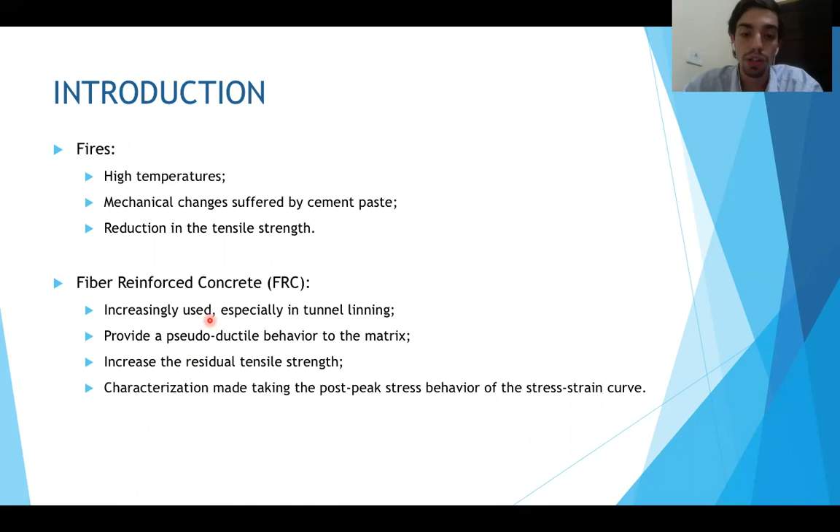The use of fibers is increasing in Brazil, especially in tunnel lining, a situation in which the fire is crucial. In addition to the ductilization, fibers promote the increase of residual tensile strength. In other words, the increase of post-cracking strength. A major guide for FRC is the fib Model Code 2010, published in 2013, which provided a great guide to design of structures of FRC.

To characterize the FRC, we have the flexion test, which offers results against safety, because the fibers act in tensile strength and there is no pure tension, only flexion; there is a portion of compression adding the resistance. In addition, the specimens are large prisms, which are difficult to handle, especially after being submitted to high temperatures, which makes the concrete matrix fragile.

There is also the double punch test, but it causes crushing of the matrix and its analysis is difficult, since the crack, which is a difficult area to be measured, is complex. Finally, there is the DEWS test, double edge wedge splitting, proposed by di Prisco in 2013, a test with a more difficult preparation, but which provides results that are easy to read. It was the method used in this research.

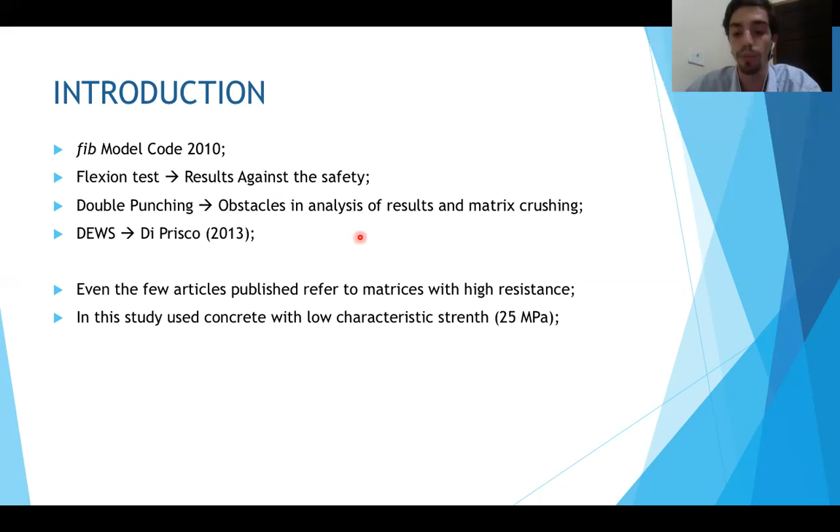The literature on FRC at high temperatures is very scarce, and the published articles refer to the matrix of high resistance. In this research, we used low strength concrete, class C25, common in the city of São Paulo and throughout Brazil. We use as material for molding high initial strength cement, artificial sand, gravel 1, superplasticizer additive, and short cold drawn hooked end steel fibers in a content of 25 kilograms per cubic meter of concrete, and a water cement ratio of 0.58.

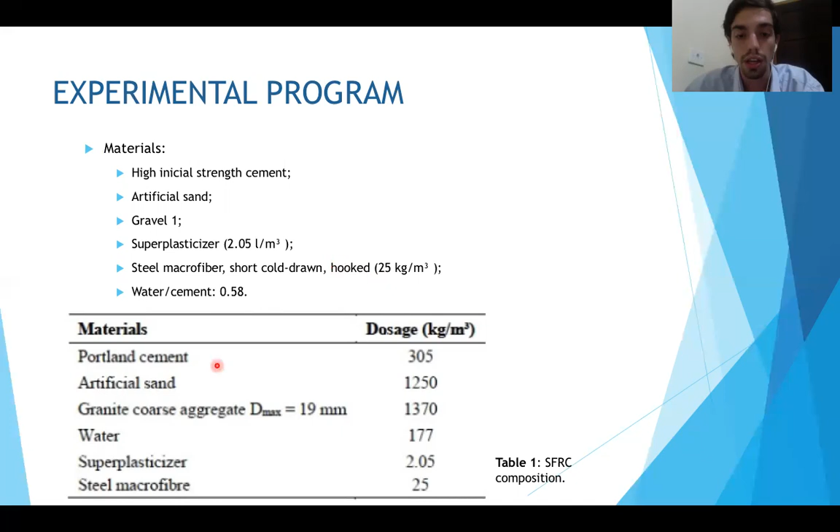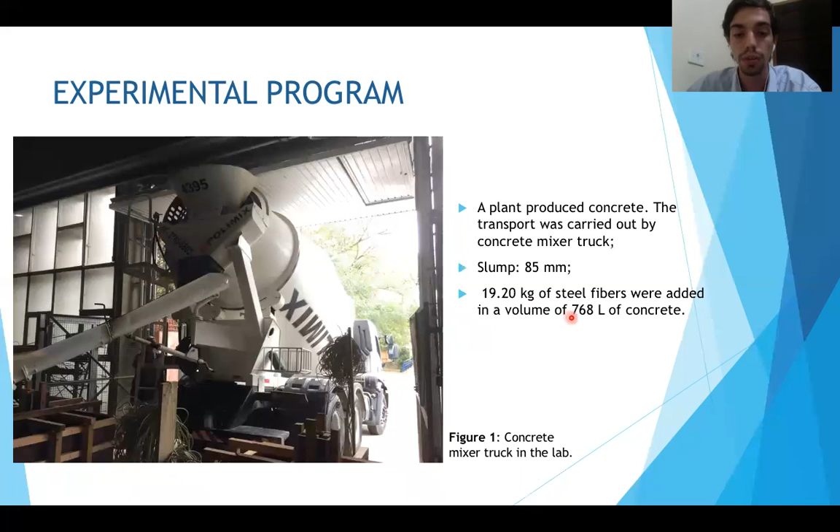The dosage of all materials is in accordance with the table shown here. A plant produced the concrete, and a concrete mixer truck carried out the transportation to the lab. The slump test resulted in an 8.5 centimeters reduction. Removed from concrete for other purposes, 19.2 kilograms of fibers were added in 768 liters of concrete, resulting in 25 kilograms of fibers per cubic meter of concrete.

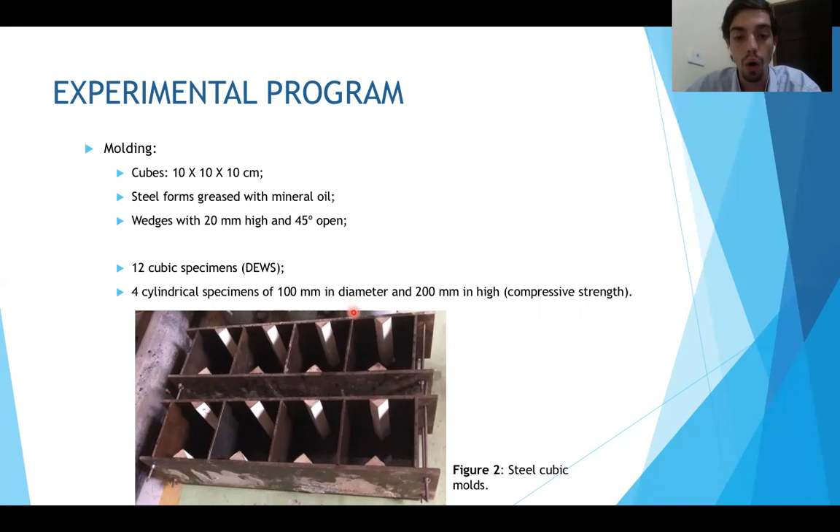The specimens were molded in steel shapes with wooden wedges fixed on the sides. These wedges are 2 centimeters high and 45 degrees open. 12 cubic specimens with a 10 centimeters edge were molded for the DEWS test, and 4 cylindrical specimens with a diameter of 10 centimeters and a height of 20 centimeters for the compressive strength test. All forms were greased with oil to facilitate stripping.

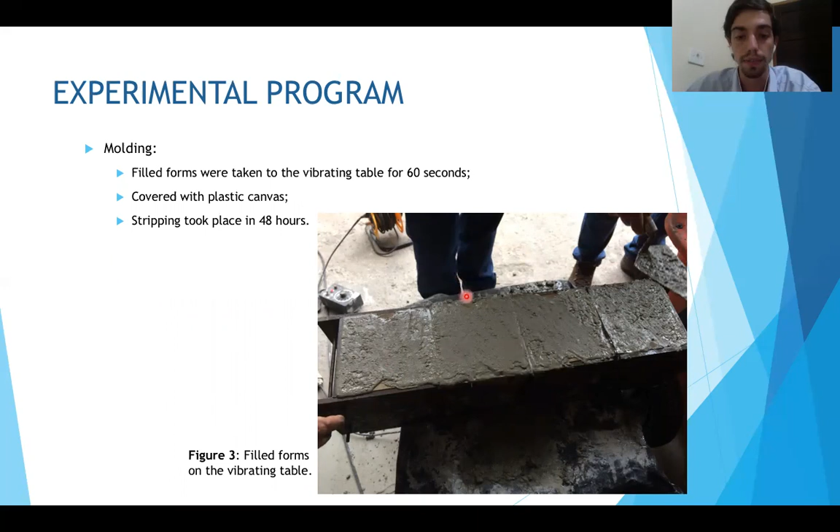All specimens were taken to the vibrating table for approximately 60 seconds and then covered with a plastic canvas. The stripping occurs after 48 hours. After the stripping, water was sprayed on the specimens that were again covered with plastic canvas for 60 days.

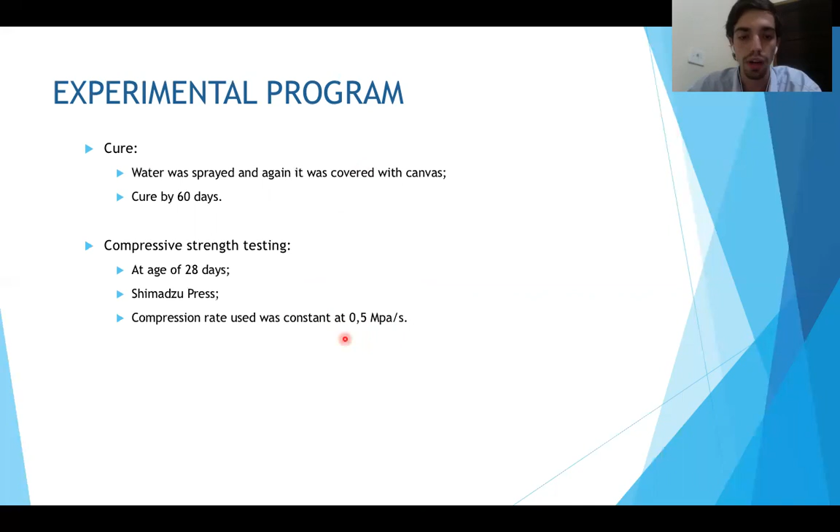The cylindrical specimens were submitted to the compressive strength test at the age of 28 days in a Shimadzu press with a compression rate of half a megapascal per second. After curing for 60 days, a groove was made in the vertices of the wedges, 5 millimeters deep and 2 millimeters wide, in order to induce a type 1 crack.

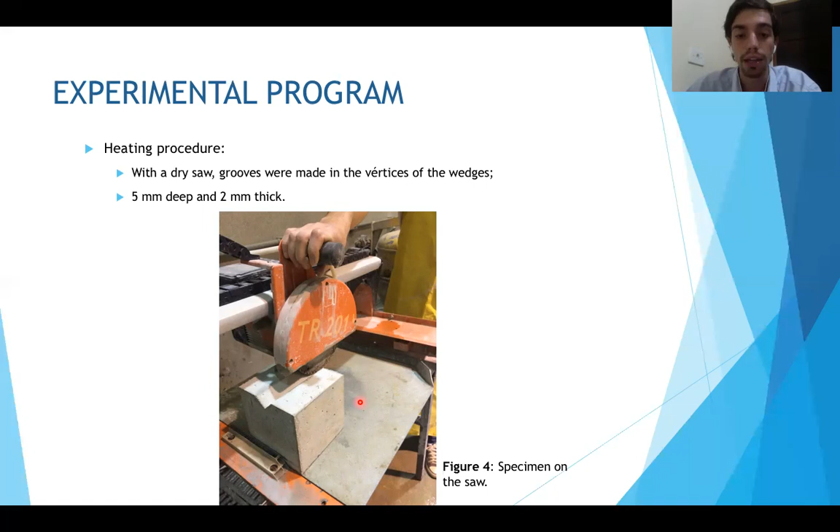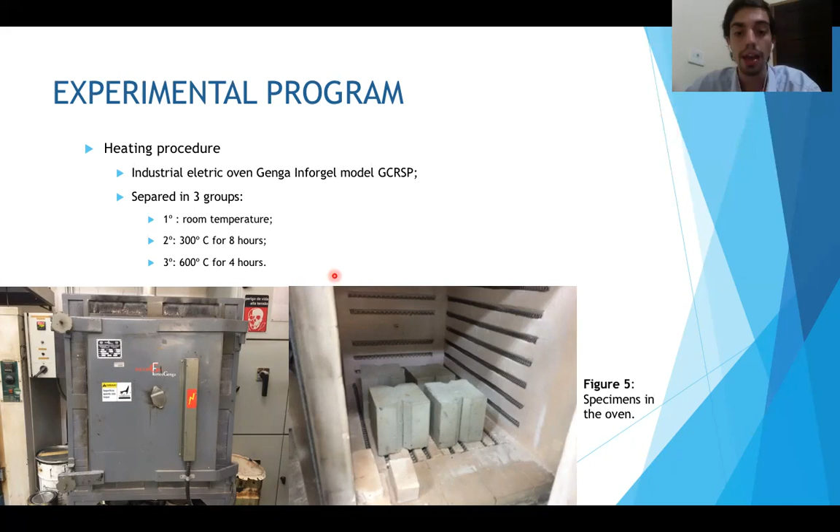After grooving, the specimens were heated in an industrial oven. A group of 4 specimens are kept at room temperature to establish a reference. A second group of 4 specimens were heated at 300 Celsius degrees for 8 hours, and a third group heated at 600 Celsius degrees for 4 hours.

After that preparing, the test itself was done. It is an indirect tensile test where a type 1 crack of pure tension is induced, enabling easy analysis. To measure the crack opening, 2 clamp extensometers were attached with elastic on opposite faces of the cube, perpendicular to the crack plane, as can be seen in the photo.

An electromechanical press EMIC with an open system for speed was used, with a loading speed of 0.12 millimeters per minute. To avoid interference with the results, a 3 centimeters diameter steel roller is used between the press and the cube, supported by the surfaces molded by the wedges. In these surfaces, steel sheets are fixed and powdered graphite is spread to reduce friction.

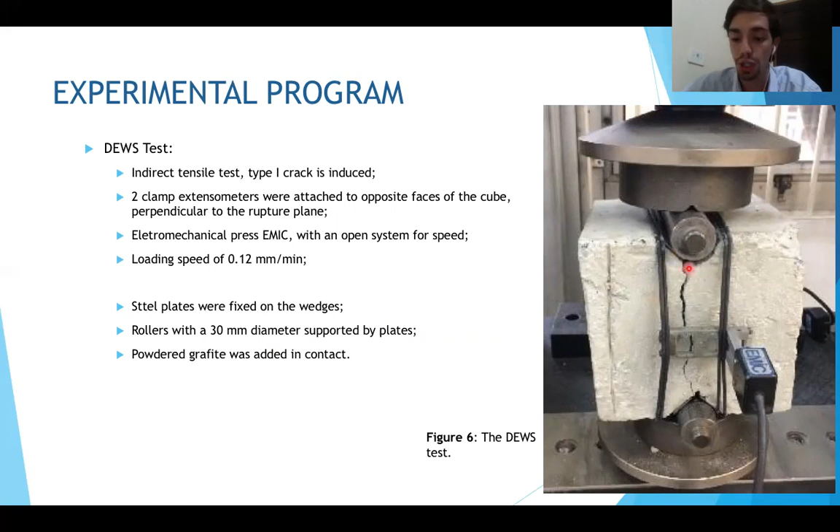As a result, there was no spalling on any of the specimens during heating, neither crushing of the matrix during compression, indicating that it is an efficient test that provides representative results. At 28 days, the compressive strength of the concrete was 28 megapascals, with a standard deviation of 0.9 megapascal, confirming that the concrete is in fact class C25.

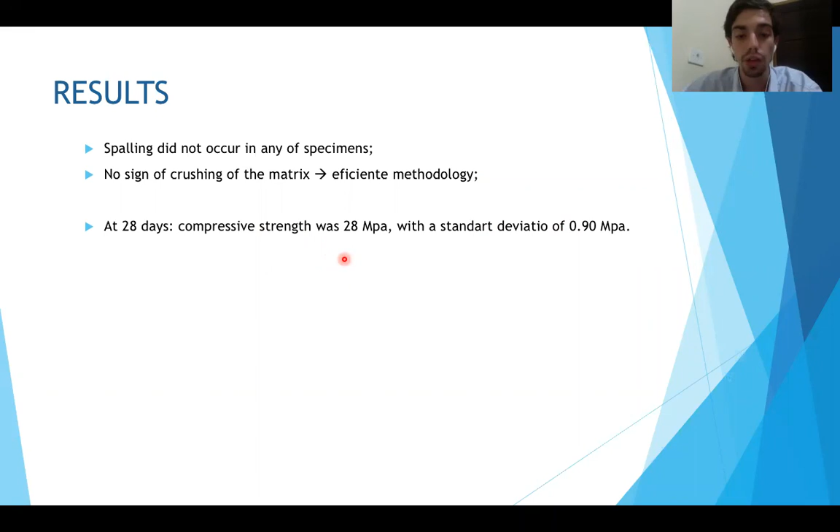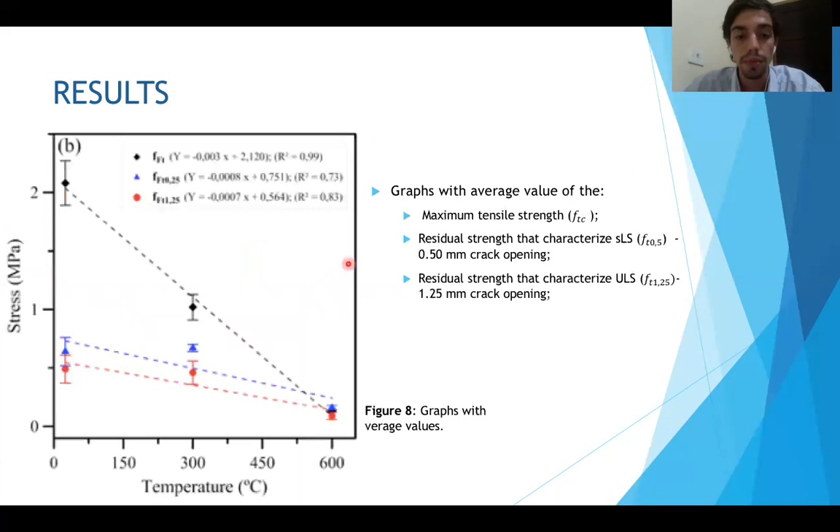This is because at 300 Celsius degrees, the paste is already deteriorated due to thermal degradation, cement dehydration, efforts of thermal origin, and change in the pore distribution. Therefore, the paste is already fragile. As the peak strength corresponds to the rupture of the paste, what governs this strength is the paste. The steel fibers act little. They start to act in the post-cracking stage, but at 300 Celsius degrees, they still remain intact. Therefore, there is no great reduction in residual tensile strength when comparing temperatures of 300 Celsius degrees and 25 Celsius degrees.

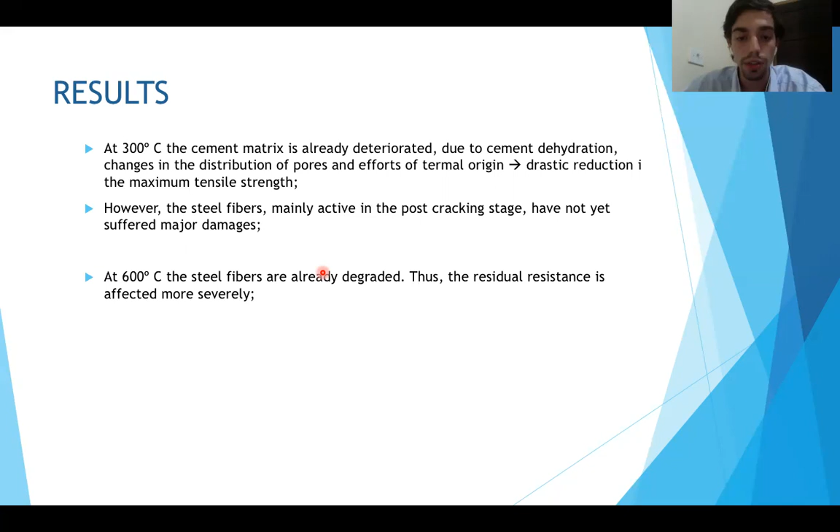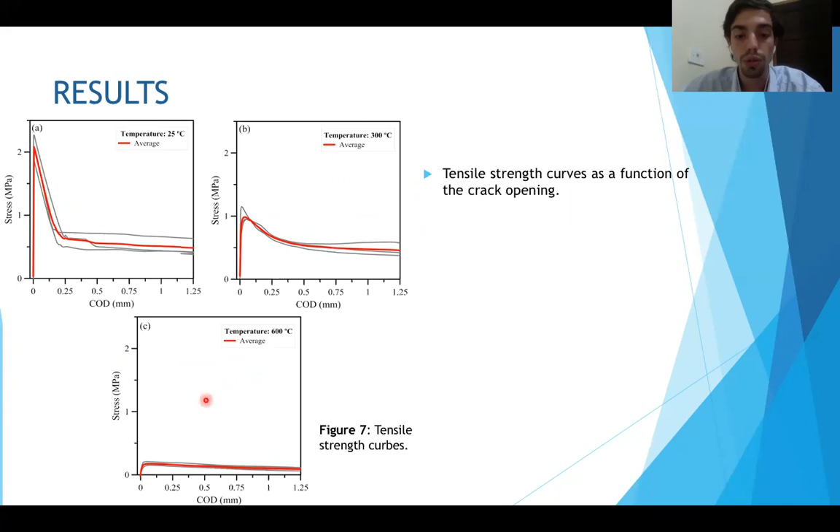At 600 Celsius degrees, the paste deteriorates further, reducing the peak resistance, and it's noted that there is practically no peak. In addition, the steel is already deteriorated. Therefore, the fibers that have the role of sewing the matrix do not sew as well, reducing the post-cracking strength. What you observe then is that the fibers fulfill their role after rupture, ductilizing the structure and preventing a fragile collapse, increasing the safety margin for a temperature of up to 300 Celsius degrees.

In addition, this proved to be an efficient methodology also for low-strength concretes. A type 1 crack was induced, implying an easy analysis of the results. And the tensile strength of the matrix has been reduced by 50.96% and 93.75% for temperatures of 300 Celsius degrees and 600 Celsius degrees respectively. For the SLS with a crack opening of half millimeter, the resistance did not change significantly at 300 Celsius degrees, and it suffered a great reduction of 75%

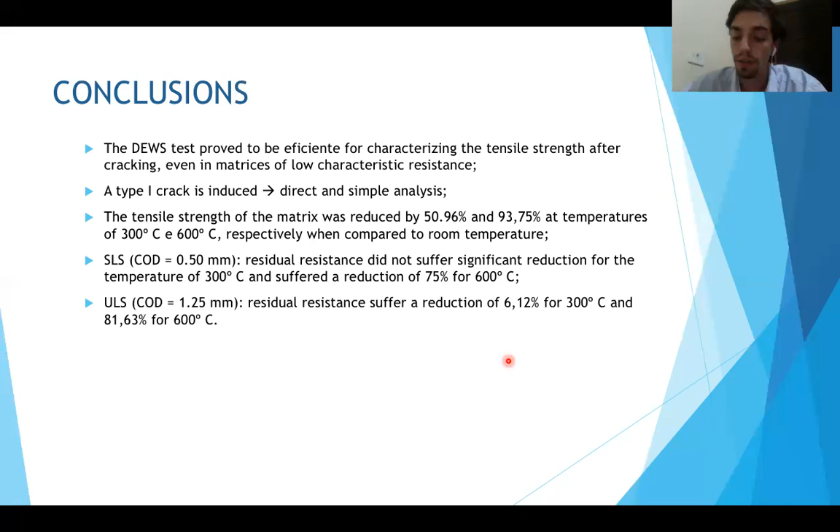at 600 Celsius degrees. And for the ULS, the residual resistance at 300 Celsius degrees suffered a small reduction of 6.12% and at 600 Celsius degrees, a great reduction of 81.63%. Thank you very much.